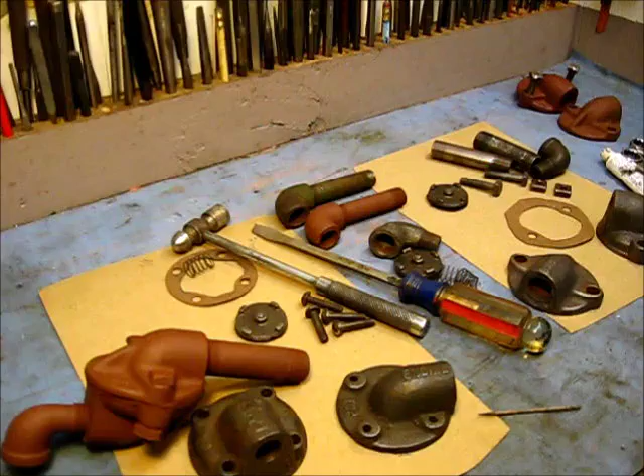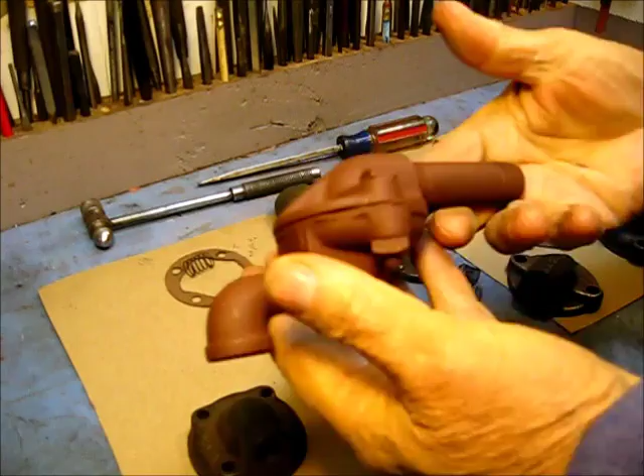Moving on with this rear breather here. This is what the complete unit finished looks like, and this right here in the catalog - the part number for this whole thing is 9249T.

That's a nice one right there. It's got a new leather in it and the correct spring. It's a really good one right there.

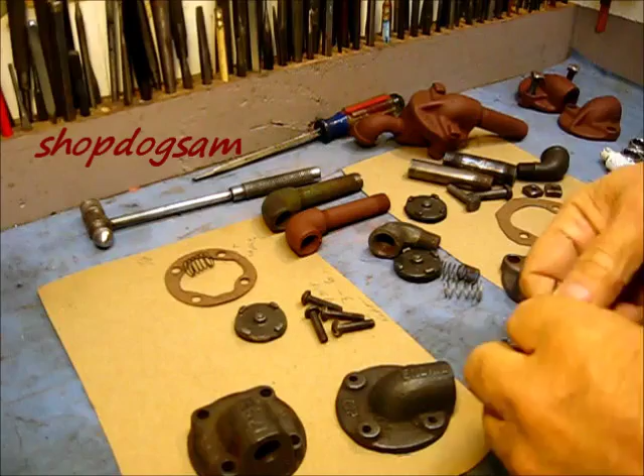I show you that for the reasoning. Oh, there's that Cracker Barrel toothpick. We'll put that right back up there - there's a handy little tool right there, that Cracker Barrel toothpick. But I'm going to try to get this right. If I get it wrong, just leave a comment down there.

I'll show you something on these breathers here. It's a breather video, and the difference is - this breather here, I'm putting this together. This breather here and this breather here are for the Type M International, and then later on McCormick-Deering Type M flywheel engine, gas engine, kerosene, and according to time period.

I was cutting some gaskets and getting up some springs there, putting some leathers on yonder. And it come to my attention that well, we talked about this one time, but not in all seriousness - that same thinking is the wrong part on the wrong year. And that was the reason for me to drag out these manuals from long ago.

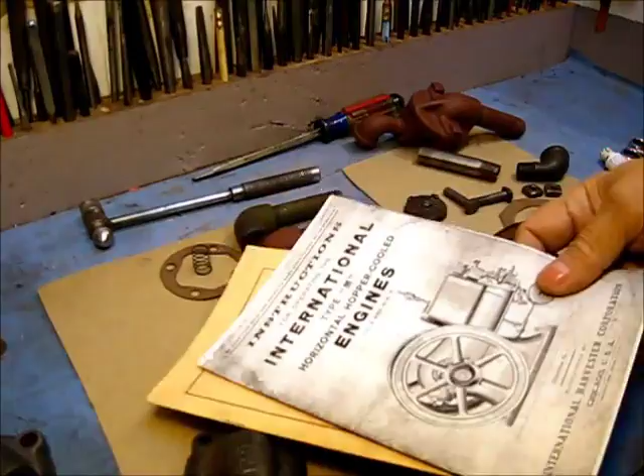And this one right here, that's a 1917 International Type M, it's what we're working on. A 1917, the printing date was 5/9/17. That's the earliest one of those I have - just one that was on top of the pile. This is 1920, that's 8/7/20. It's close enough to explain the differences here.

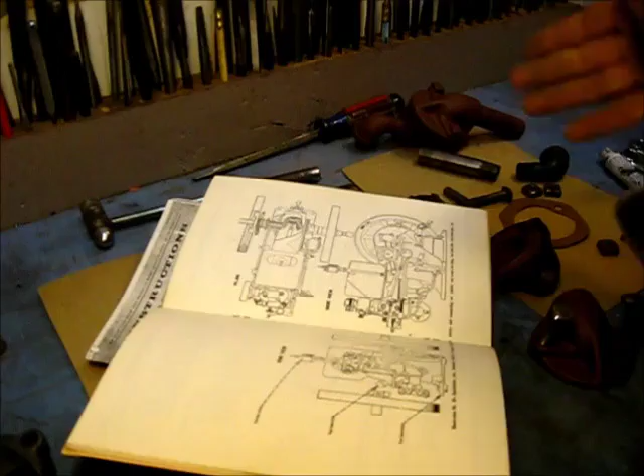And immediately, if you go into this book right here, you should have one of these. If you own an M, you should have one of these in your possession. I don't have one for sale - believe me, I'm not blowing my own horn here. Somebody else will make some money on that. Or if you have a friend, they could reprint it and give you a copy of it, which is - this one was given to me by a real good friend. That's a copy.

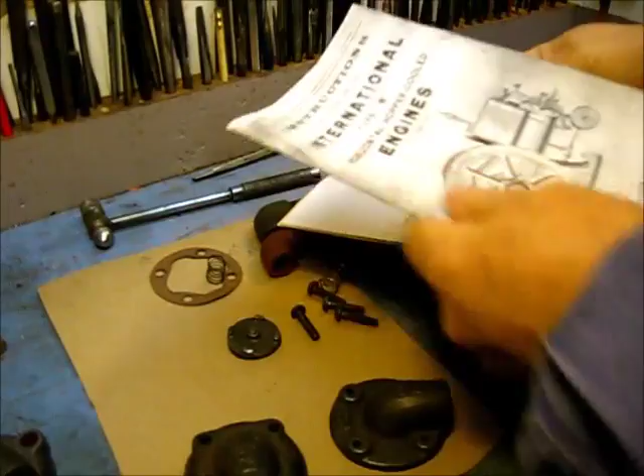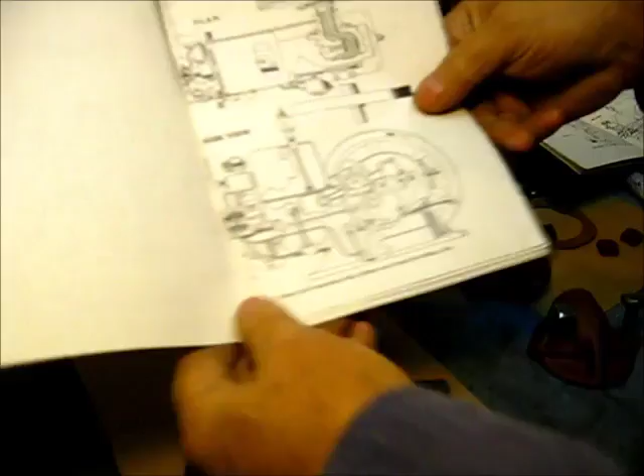But the point I'm making, in this 1917 verified, I had the original book in hand. When you look at the rear of the engine, right here, you'll find this. This right here, that's in that picture right there. I don't think that's the one they took the picture of, but it's identical to it.

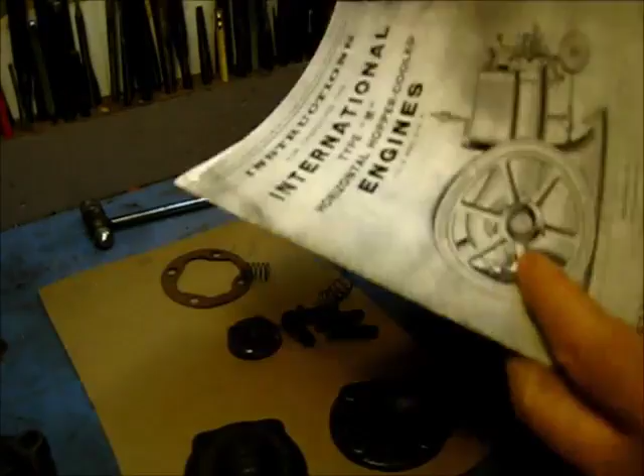I have two of them right here. Okay, they're 1917 or 18 - these could have been in. I think the engine I have is a 1918, I think it is. But this is original paint, even to the color that was on that engine, and I kept this as original.

That one. And this one here I cleaned up in the electrolysis and primered it, but it's the same thing. It's vintage, those two. I do have this engine.

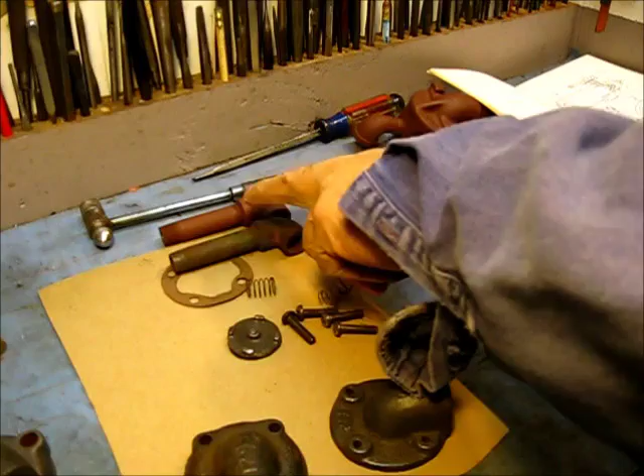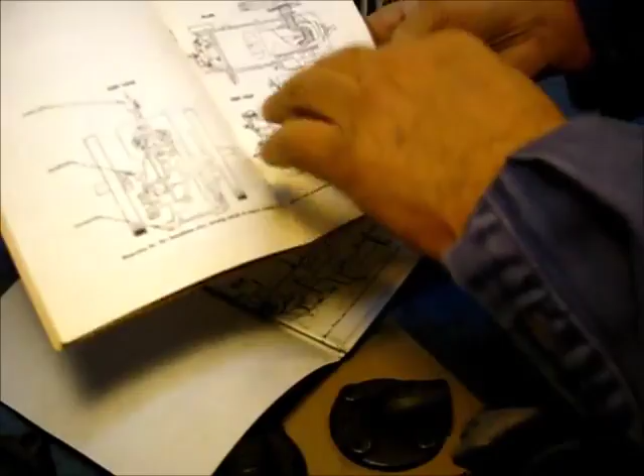Looking ahead - little harshness in the throat there for some reason, talking too fast. Looking in this book here, dated 1920, the same engine, except this is overstrike and that's an understrike. There's a couple of different differences that are well worth having these two instruction manuals in hand to compare the two.

And the other one is this breather here - that's this one right here, this one here took apart. That's it, so the two differences within a couple 1 year span. Okay, the point, the reason, and this is well worth taking note of if you want to. If it's something you think you'll need to know, then pay attention - it's important.

And that gasket there that I cut, you know, somebody's going to ask how thick that is, and I really don't know. But it's kind of on the thick side, but it's the right color at least.

This one here was only on 1 year. I made a note - 1919 was the only year that this, I'm gonna put it together as we talk about it - there was only a year that this breather was put on an engine.

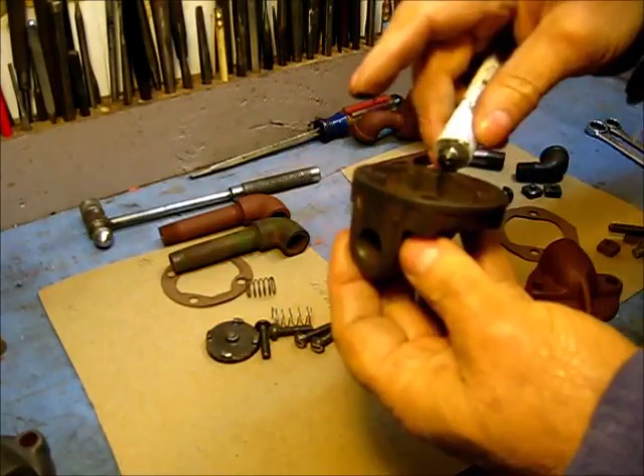Only 1 year, and I'm gonna put some Permatex around there, right around outside there. It's not something you do not - it's not something you want to leave out. It's important, just a little. Don't put enough on there to where it - I know you're gonna say, how come you didn't use a gasket on there? And there's a reason, I'll tell it to you.

The flange thicknesses on this casting here, it's cast iron.

The flange thickness, meaning where the gasket's going to go, it's like 1/8 of an inch at best, and right there is hardly nothing. It's in thousandths. So it's important. Make sure that you have a good seating surface in here.

This is the check valve we're going to use right there. That's it, with a new thing on it.

Okay, now before we move on, let's talk about these springs. This spring right here was the spring that was in this breather when I took it apart, and then it had this thing in there, but the leather had deteriorated beyond being usable. So when you assemble it back together with this spring, even with the new leather and everything on it, when you put it in there, it's still almost 1/8 of an inch below level.

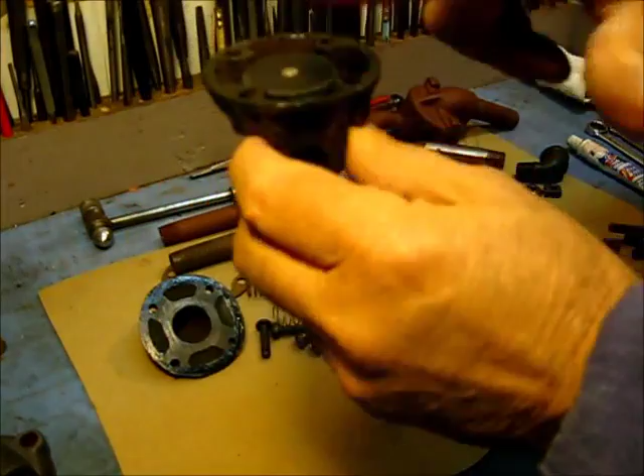And this top piece right here, it's simple deduction - this flapper has to have enough spring tension in order to at least make it be some distance above level, plumb. I'll show you something. If you hold it up this way and sight right down through yonder, you would want to see this sticking out, be out of plumb. Like this, not like this right here, just this way.

There's another word for that. Whew, man. If you know what that word is, leave a comment. I think it's going to be something that we don't need to know, but okay.

This breather here was '19, and '19 was the only year they made it, and they made it for the 1.5, the 3, and the 6 in the kerosene model. 1919, that was the only year they used that.

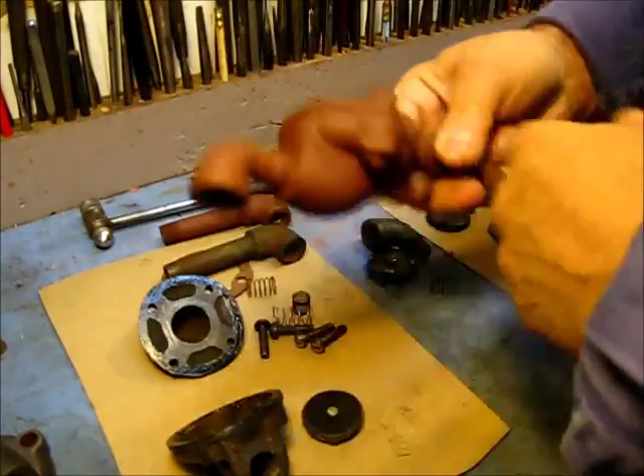Before that, the engine you got would have had this in it. If you had this engine or that engine, and you went to the dealership to get a breather because something happened and you needed another one, when you went up there and he looked in the parts book, it would refer him to this one. This is the one you'll have most likely. If you've got this on a late model engine, it's not right. Take it off. Now that you know it to be a fact, you can set it right.

It'd be better not to have one on it. Well, no, it'd be better to have this, because this was on a 1920.

So I did locate a spring. This is another spring out of a good breather, and you can see there it's not hardly half the tension going out of it, but this is the original one. You can take note of stuff like this when you find a good one as to what you think that tension is, and it's not very much. It's just enough. I can explain it to you.

It's just enough tension there to, when you put this little thing underneath - can y'all see across yonder? You see that's a little bit higher. So when I put that top on there, it's going to hold it just at closed. That's all it's required of it, just at closed.

And I cut a gasket, and I did leave it a little bit big because I want to be confident that I don't have no leaks. It's just unnecessary to have a leak. That's all I got to say about that. And put that right on there.

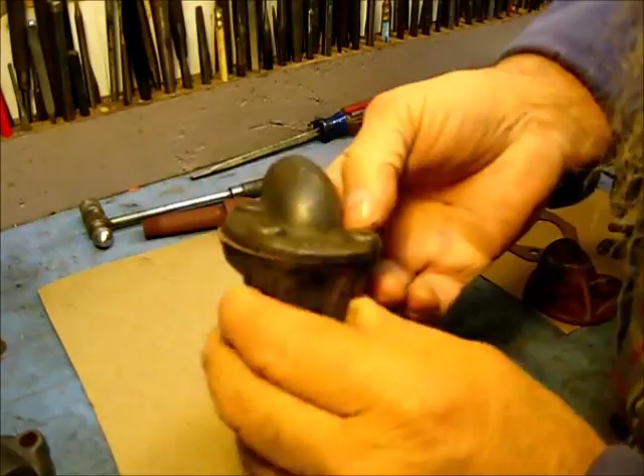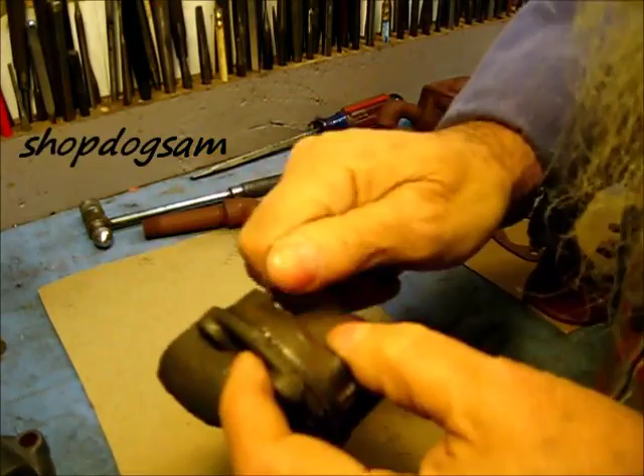And like I say, this is the one that they refer to as the 4-bolt. Only one year of production, and that don't mean it's worth all that much more money, you know what I mean? If you've got an engine that has this on it and it's the wrong year model, and you have a friend that has the other one, well, pass it on to him and then find yourself a late model one.

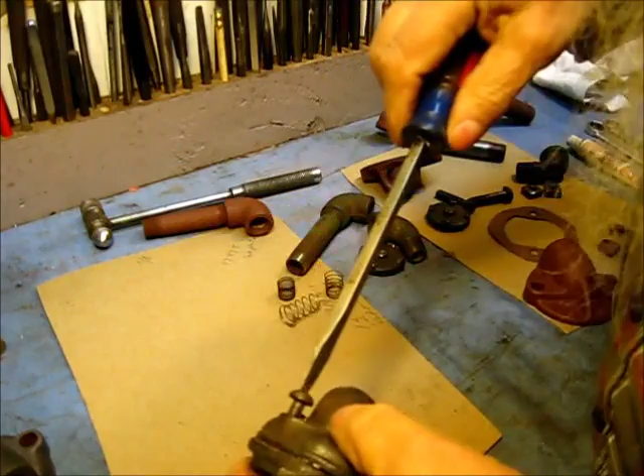You know, make a friend. That's kind of the way I got this one right here. It was a real deal. And these don't go on backwards - the front goes in the front and the back goes in the back. We got the gasket, we got the spring, we got the little flapper in there, and it's correct and everything.

And these right here are just 1/4 20 bolts, no cadmium plated bolts. Go to the trouble, if you've got one of these and you're doing this and you need some new bolts in it, go to the trouble to locate them. It's not that hard to do. By all means, get unplated bolts for your old engines. You know, man, how easy that is.

But tighten these up really good. And I left that gasket, I always do.

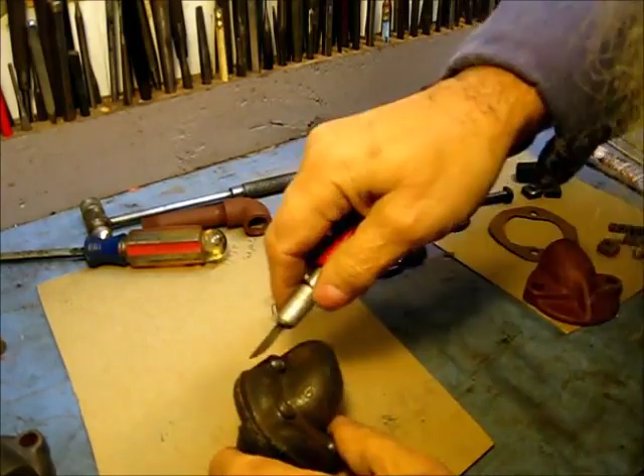Actually, there's a little bit of play in these in order to line this top and bottom up. There's a little bit of play, but not very much. And I did leave that gasket just a shade big, so that I'd have the opportunity to go right around it. You know, see it's sticking out a little bit. So what I'll do is take that blade.

Oh, it's safe enough. And I'll take that blade and go right around through yonder and trim away that excess. Oh, that's pretty good. And a little thinner to go there. I'll get that off with a little thinner right there.

And I'll show you something else too. Now, I think they were talking about this on Harry's old engine website. I'm pretty sure there was. And I think the person had this breather. Yeah, the top of that right there is a 1796 part number, and that bottom right there is a 1795T part number. If you get this whole thing assembled, it will be a 1797T.

Assembled. And what I was going to show you is the hole in the back of the engine is 1/2 inch pipe. Is this right here in this early model?

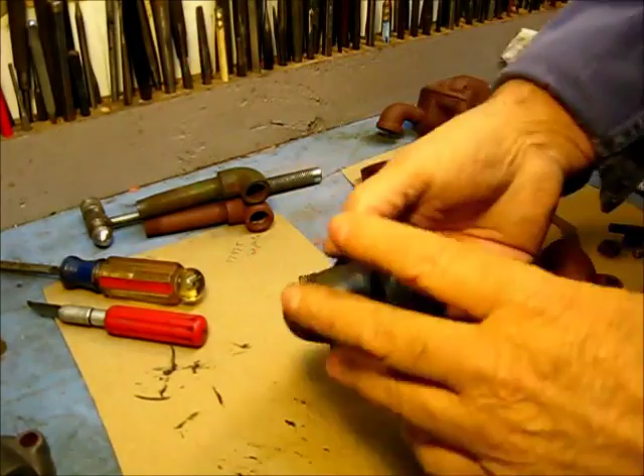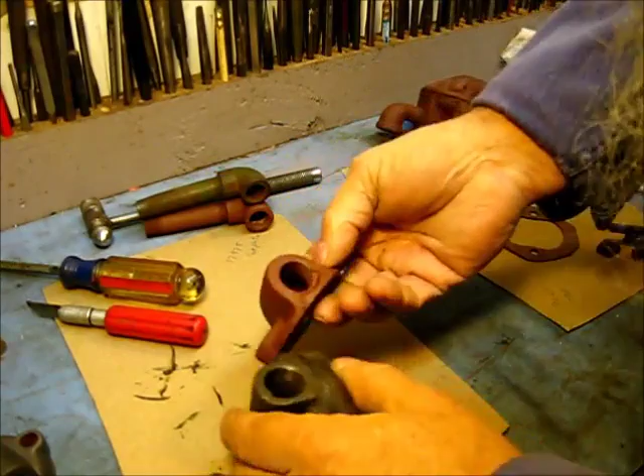So that this breather would not have gone on. The very first one would not have been there. Then the inlet, the part that goes to the engine, compared to this two-bolt part that goes to the engine, they have the same size. It's 1/2 inch pipe. They have the same, right here it is, the inlet from the engine is the same. Right there. Goes right there and it goes here.

Okay, if you turn both of these around... I got two tops out there. I had a bottom. Here they are. When you turn the bottoms around, they are 3/8 pipe, which is this turn-down thing right here. This is the part that goes downward. Usually with a pipe coming down here like this, the drain pipe, and then the inlet would have been this 1/2 inch pipe.

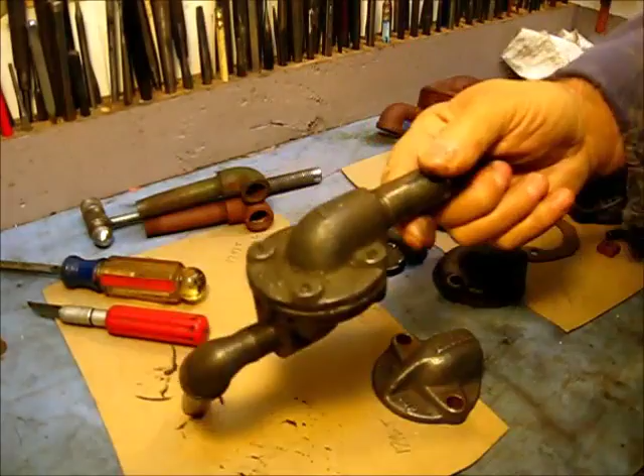And they only used this for one year, 1919. So if you've got a 1924, then this would not be the breather to use on it. It's kind of interesting. And that's the same setup here. The one they say to replace it with would be the same 3/8 pipe, like that. Would be the same thing. 1/2 inch pipe on both ends. On this end, 3/8 here. Same way.

So that's just what I'm doing today, assembling these two. And I'll show you something. Like this spring right here. See, that spring's a little strong. It's too long. When you put that in there and you put this on here and you push all that down, see, that's too tight. It would not work. It's a PCV valve, that's all it is, a PCV valve.

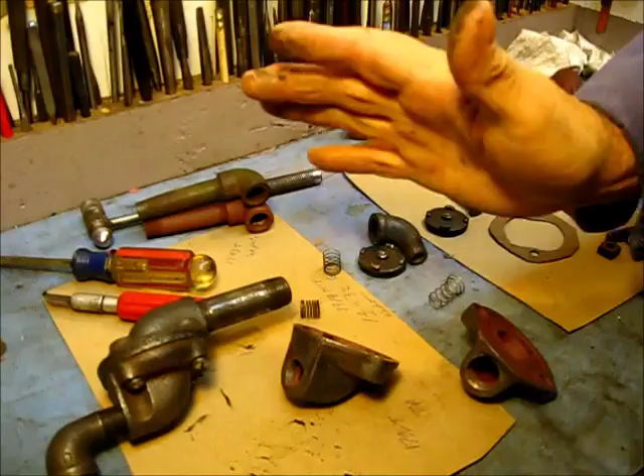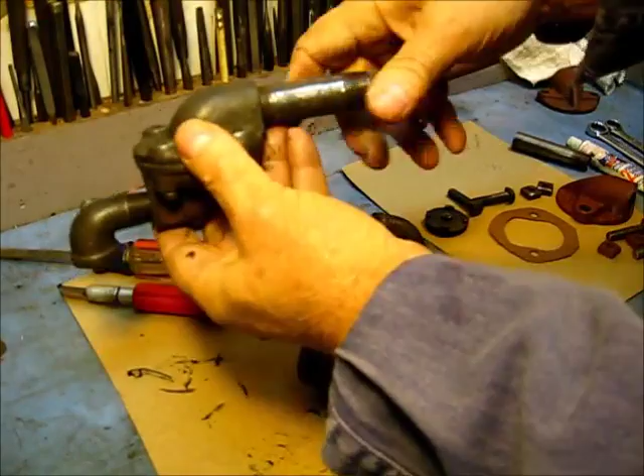But you can get all of these parts in harmony with each other, and your engine. What this does is when the piston comes back, the pressure in the crankcase, in the housing, will be pushing backwards on here, pushing out. Then when the piston goes forward, it pulls a vacuum, and that check valve in there comes up and vacuums that, and it puts a slight positive vacuum on the crankcase, so that your oil don't go out.

So ideally you would never have too much air in there, because that would blow the oil out through the bearings. And the way this thing is supposed to be regulated and everything, in a perfect world, it would expel exactly that amount of air, and then when it pulled a vacuum, it would pull exactly the amount of vacuum to where you weren't pulling all the oil away from the bearings. You'd be hitting that perfectly happy medium to where it could go all the way to the end.

Oh, we got some brilliant engineers in this world capable of that feat.